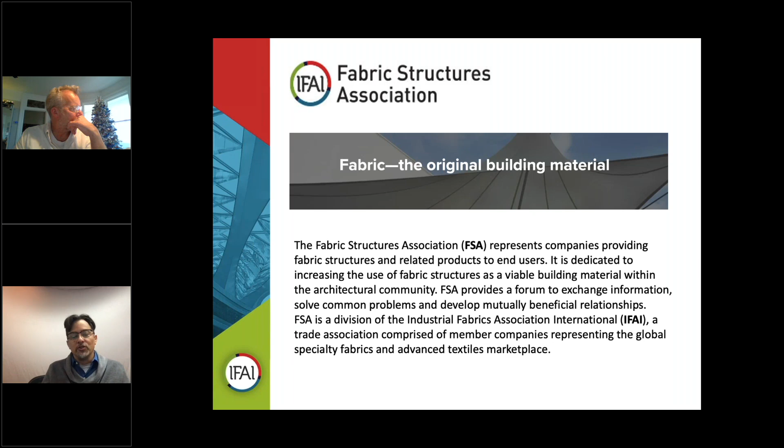How we're going to do today is we're not going to actually run the course as if we were presenting to an architect. We're going to talk a little bit about that, but we're also going to talk about what it is to be a member of the Fabric Structures Association, what it is to give this course representing the whole of the Fabric Structures Association, as well as representing your expertise. We want you to remember, if you're giving this presentation to architects, you're the expert in the room. Don't count exclusively on the material here. Show your expertise, but also cover the broad range of material shown in this slide, because we really want to give an overview of what's possible out there. Know that if it's not what you do, there's someone else in your industry, in your association, who does this, and you can still be the expert passing off a job and securing another job for your company.

So the goal of this course is to give an overview. It's really pretty basic, and I think the idea is to give material that none of you feel concerned about giving. It has a lot of imagery in this course.

So what are fabric structures? What are the building materials? What are the types? How can we classify them, and know a little bit structurally about them? What are the advantages of material choices? What are the options, and where will we find these things? You'll see us go through this in a variety of ways here, and again, we're trying to set this up for you to be successful in giving this course.

I also want to mention I'll be doing a lot of the presentation today, and Dave is going to be looking to your questions, adding more details on each slide. So I'll kick off most of the slides, and Dave's going to follow up and look for your questions. Feel free, especially if it's in relation to a particular slide, to put the question right up there, and maybe we can handle it right then instead of going back — it'll be good to talk about in that course. I'm the official peanut gallery, right, Mar? That's right, your official peanut gallery.

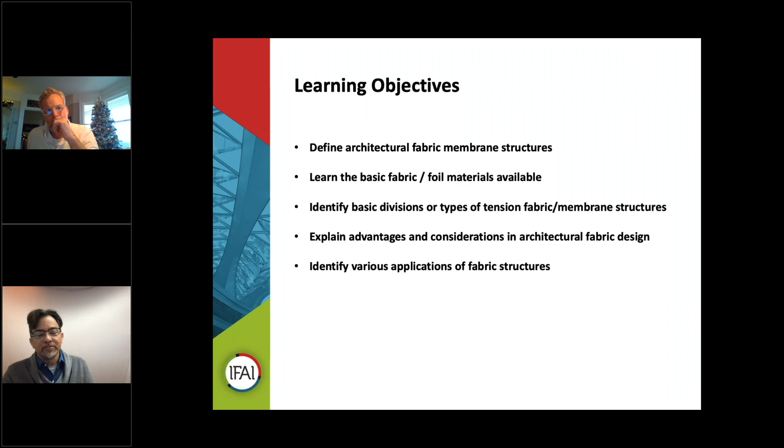So the first one, we're going to talk about what is an architectural fabric membrane structure. This is broad, and I want to start with a broad slide, kind of diverse, and I'm not even showing the full diversity here.

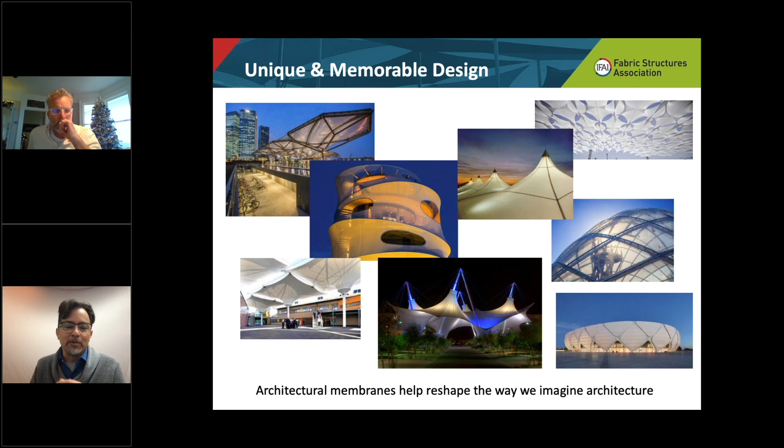Architectural membranes help reshape the way we imagine architecture. That was put in there just like it's an original and unique building material. How can we rethink about everything we do? One of the things we know as the board of the FSA, and has talked about a lot, is how architects tend to think of their standard materials. We have concrete, we have bricks, we have glass. Membrane is an original material, and we want to make sure that's in their mind as a way they can build.

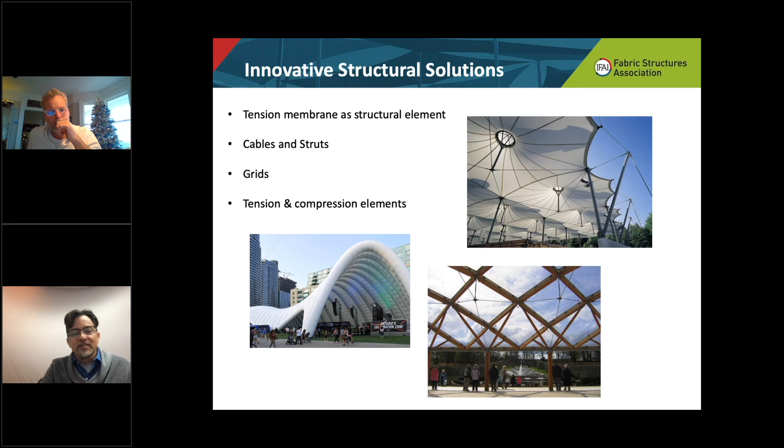What's innovative about using fabric structures? How can a tension element bring innovation that has many benefits? We'll talk about the benefits more. I'm going to go through some of these quickly.

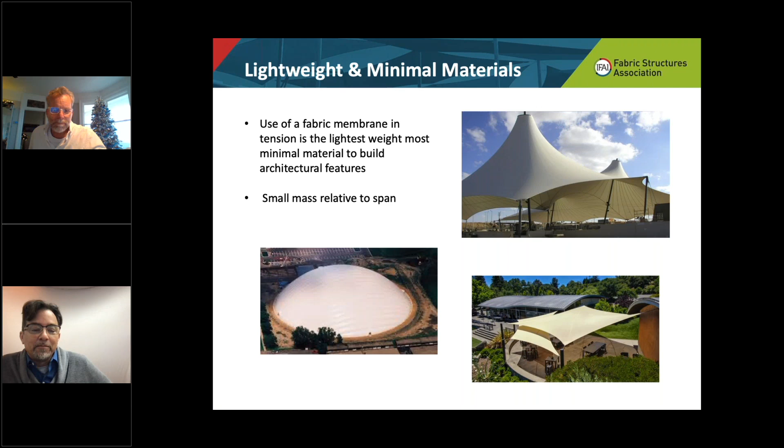Lightweight, minimal material - I think you all know this, but we really want to point it out to the architects - it's the less weight characteristic, less steel, less materials in the project than a comparative other way of building. It's weather protected. This would be physical lightness as well as visual lightness, right Mar? That's right, yeah. Visual lightness makes a lot of the beauty, the visual lightness, the light quality coming through it. All of this, absolutely correct.

Weather protective - what are we trying to do with the fabric and the abilities to handle that, working with it in this kind of lightness way, minimum materials.

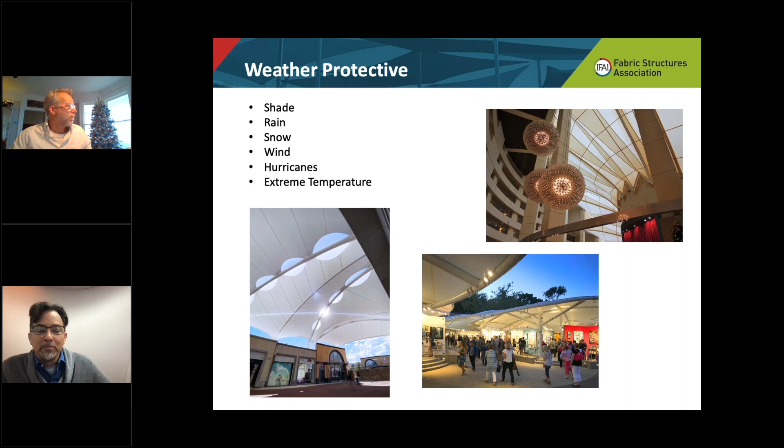And to jump to this one, sustainability by design. Now sustainability is a big buzzword out there, and you have to be - we're working on that a lot as a company - but it takes a lot of groundwork to really say in a classic certified way you're sustainable. But there is something inherent in the design of fabric architecture and the minimal materials that by nature is sustainable. This is what we want to put out there - look at any of these structures, especially where we're under them on the upper right, lower left, there's very little materials compared to the span.

The shade structure is super minimal to put up. Even this large rain canopy on the lower left, look how light all of this support structure is. You're just not going to get this level of material minimalization in any sort of other structure. I think that points to the sustainability, because we're pulling out less of the earth, we're transporting less, our installs are efficient. Again, we're going to touch upon these points all along, but it's something that each of you and all of us as an association can really pitch - that the design, the basis of design, is sustainable.

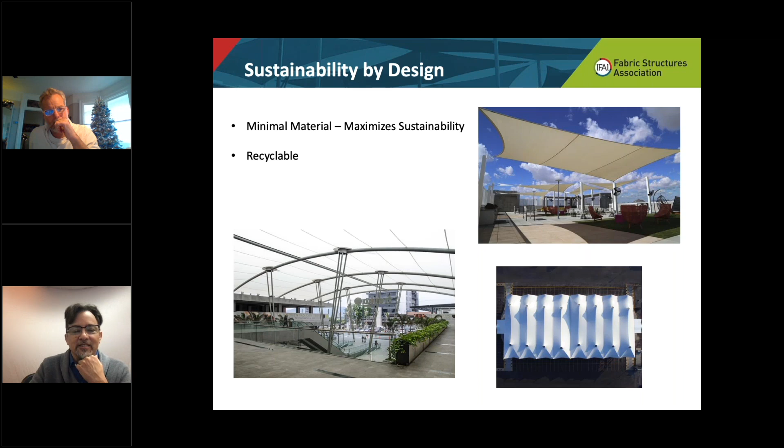And then we get into cost effective. Architecture costs a lot to build, and fabric structures can be expensive too, especially when there's a lot of details, but they can also be pretty much the most affordable way we can build.

This is always a tricky point, and in my experience of giving this presentation it always becomes a question. The architects want to know, well, what does it cost? On the note side, we're giving you a couple of notes about price ranges. Yes, there can be simple air structures that might cost teens, 20s dollars a square foot, but very expensive, very elaborate fabric structures, PTFE with lots of details, could be a couple hundred. It also depends how much square footage.

So it's more about, I think, in talking to the architects, it's really about the items that influence the cost, and reviewing these, talking it through, developing that process. But you've got to give them some background so that they get a sense that they also have to head to experts to figure this out. I don't know what you would say to that, Dave.

I'm curious, you're talking to architects about price point. What would you say? We typically say start with 150 a square foot, but you might be north or south of there, depending on the complexity. And then we also point out that cost is so much a function — we want a rule of thumb that's about surface area and covered area, but in fact cost is much more about the amount of boundary.

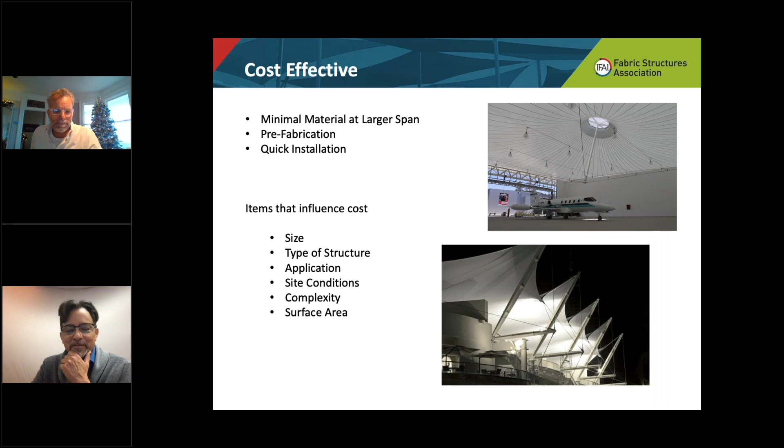So what are some applications of fabric membrane structures? We've inserted these slides of questions, both to stop the visual onslaught of all of the photos and to give a reset into thinking about the applications you want the architects to consider, and the advantages when we get there. So it's kind of giving a breath.

And then we can go on, whereas these other slides, once we're in it, are meant to go fast, unless you really feel there's something here you're an expert in — by all means use that area to expand it a little bit, show your expertise, and show the broad range of solutions available. This presentation by no means covers the broad variety of fabric structures, but there's a lot out there. So roofs, it's a simple way.

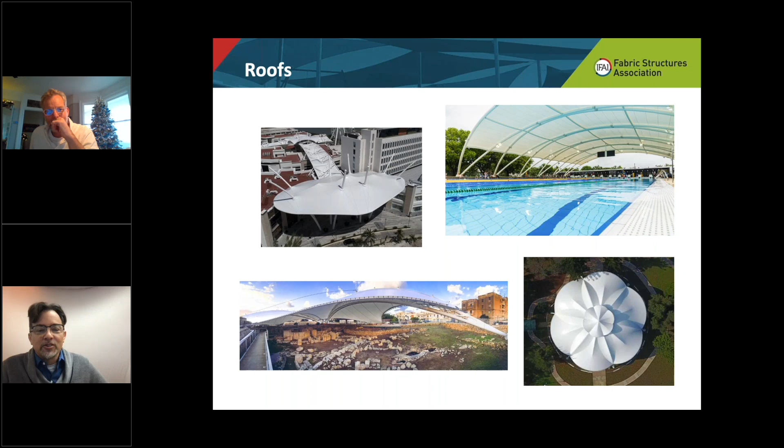I'm pretty large scale here. Roofs are also small scale, and you'll probably see — just to talk about timeline — when we republish this presentation, we'll send you the PDF so you can go out and start to give it, schedule it come the beginning of the year. There'll be some extra inserted slides, more diversity, things like that being worked on by the board now. So roofs are a key way.

Facades, this is an up and coming use that's been around a while, but it's rapidly changing in our marketplace from small scale to large scale. And we can talk about the advantages of facades — going to a membrane facade, being able to print it, or cutting down the cost while having some of the basic support structure be less expensive than they would otherwise detail it.

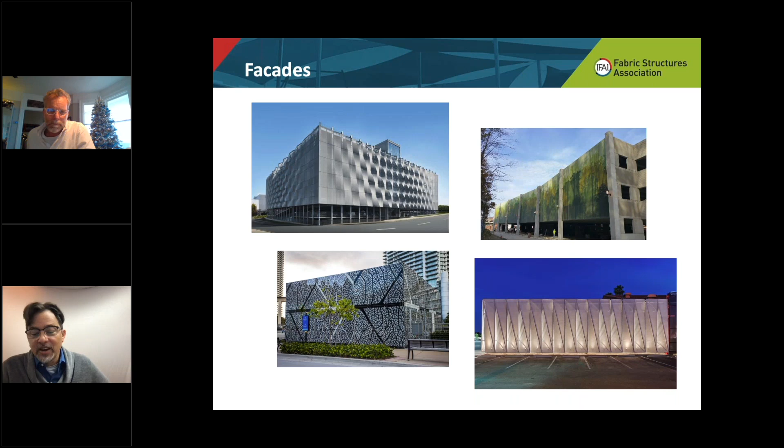The light quality in facades, in all fabric structures, skylights, atrium structures — it's again another application of roof, but a little more specific of an application.

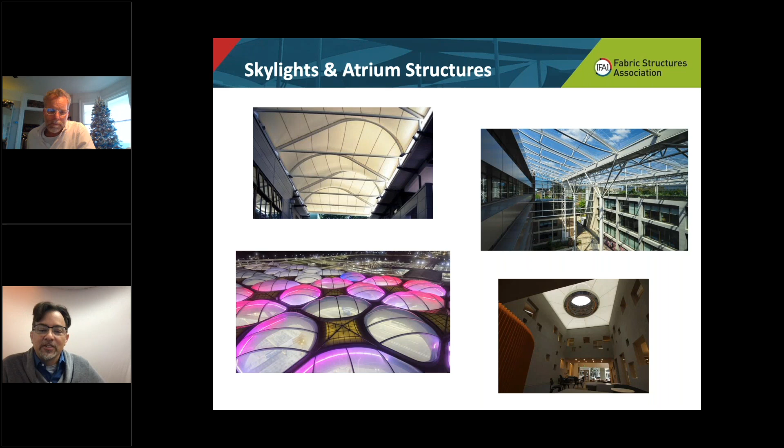Large span — this is one where fabric structures are really the only possibility when we come to really large spans, that otherwise would be too much weight in other materials to do. And so this is why stadiums are so often built with fabric structures.

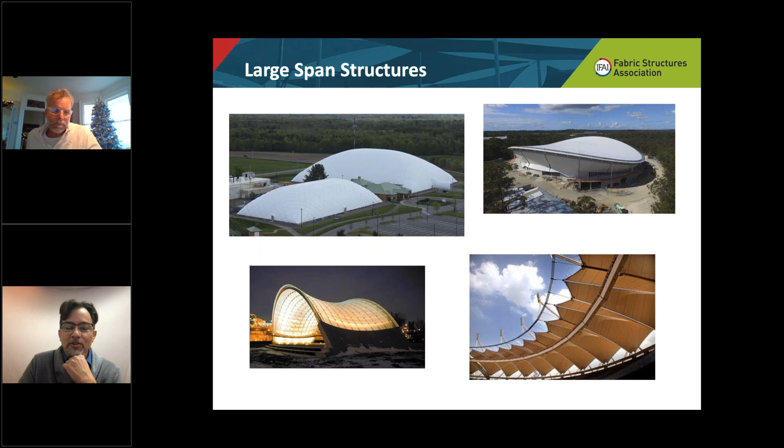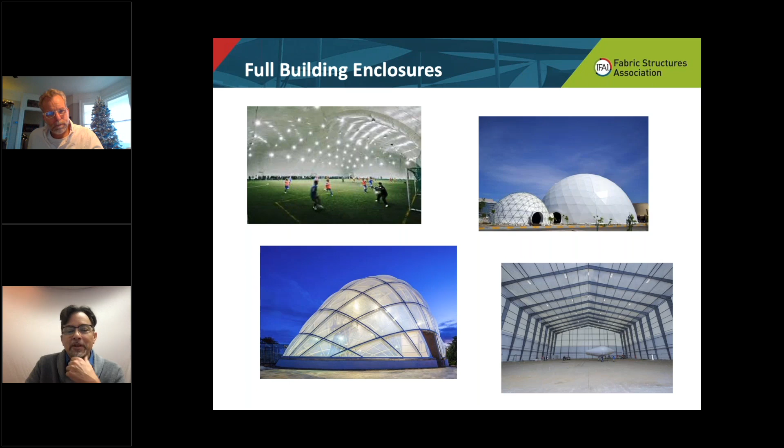Full building enclosures — this is one where, how do architects think about the membrane structure? Often they're putting it in a bubble, like, oh, it might be an awning, it might be a shade structure. Do they think of it more inclusively, like basically this can be almost all of your building? It depends on the application — everything is based on application, of course.

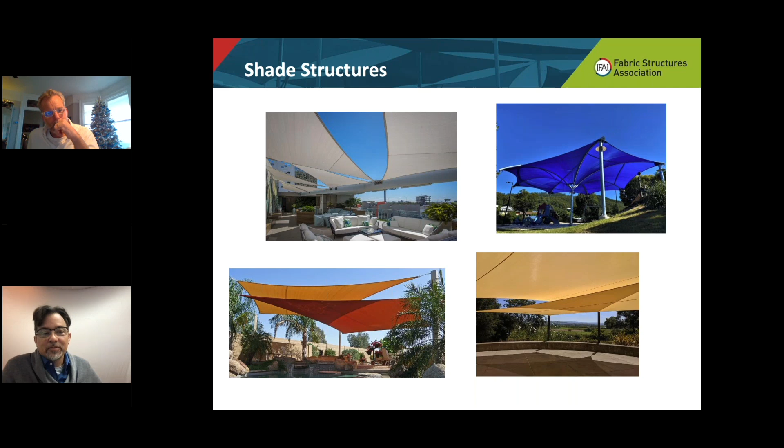Shade structures — I hope a variety of you are in the shade structure growing industry. They can be very heavyweight or very lightweight, but the great thing about shade structures is they can be so lightweight, so minimal, yet provide so much protection that's needed in this time, especially that the world is in. So we want to really focus there as well.

And I don't want to forget all the interior work, the art, the environment — the things you wouldn't typically classify as, oh, a roof or an atrium or these big architectural features, but they're very important to some of your business models, and also to how a place feels and how it comes alive.

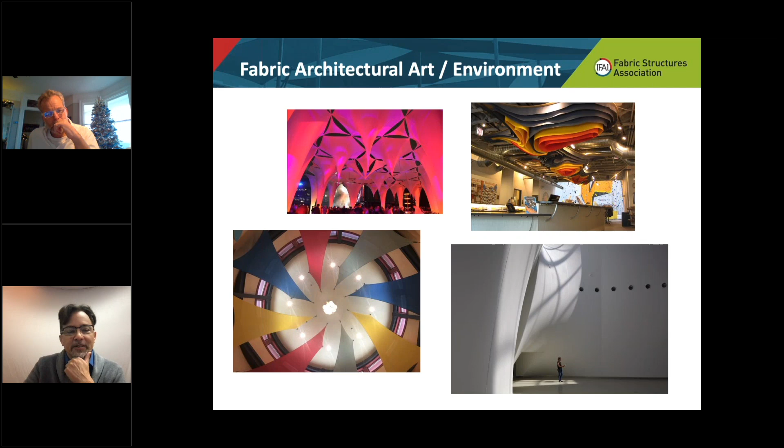Okay, so materials, architects always want to know about materials. One thing I've said, if you're doing this course in person, it's great to take along samples of materials. You might not have everything, but you can call the manufacturers and get samples. They'll happily send them to you, even if they're not ones you typically work with.

And then you show differences, because we're trying to get this broad sense of what's out there. We want to expand on fabrics and foils. The fabric is woven or knitted, whereas the foil is an extrusion process.

This is one I'm asked a lot: can natural fibers work? I'm sure you've all heard architects or owners wanting natural materials. Well, we're meeting a lot of standards and specifics - fire code, other performance needs - and synthetics are capturing that. There might be some naturals that can meet some of it, but in large part, as we all know from this industry, we're using synthetic fibers that hold up and are better solutions than natural fibers due to their longevity and meeting codes. Everything we're going to present here can meet code requirements, and different code and function requirements are going to require different materials.

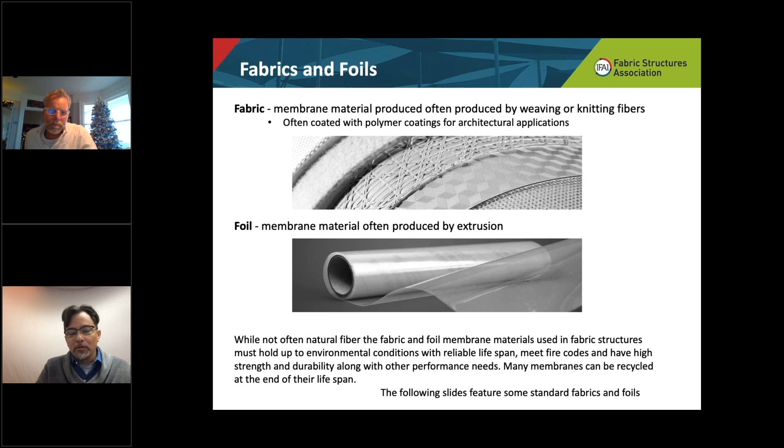So what materials get selected? You have to look at the performance criteria for the project and what's really needed. That's the job of the fabricator, the designer, to work with their client and give them the expertise. This presentation is meant to give a broad sense to the architects and landscape architects, but also to paint that you're the expert in the field, and the members of FSA are experts - no matter what it is, we can find the right expert to help them do their job and figure out which material or structure is really best for their needs.

This list of different fabrics isn't at all complete - it's kind of a quick overview. There's new formulations, new coatings, all of that out there, but we're just going through a little of it. I think a lot of this is what you pick up going to trade shows and staying aware. So unless there are specific questions, this isn't one I'll spend a lot of time on, but we're trying to give the architects a feeling of it.

In an architectural presentation, you might spend longer here or on some of these topics because of the architect's particular interest - something that links to their project. Hopefully you keep project-specific questions towards the end. If they say, oh, I have this project, say that's great, can we stay after the presentation and dive into your project a little bit, because you want to make it through the whole presentation. We're going really fast here because I'm guessing a lot of you know the basics, and if you don't, we'll send it to you so you can review it and ask questions before going to present it.

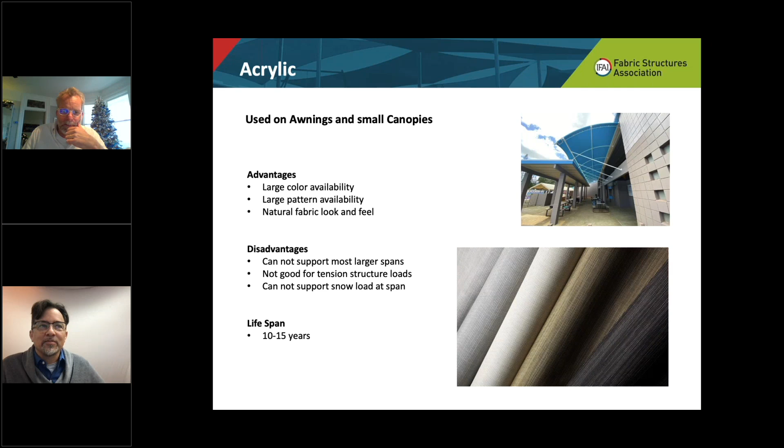One thing I try to do is, when I'm talking about a material, try to make a reference to a material the architect would have had experience with - a tactile experience. So with acrylic, for example, that's like boat cloth material - everybody's been on a boat - or awning material that you would have experienced. It's not tensile structure material, but now they kind of know how it feels and know what we're talking about. It's no longer just a word, it's actually a physical substance.

I think that's very important - just like with shade cloth, a lot of them have seen shade structures, maybe only at less expensive playgrounds with minimal uses, and you're projecting something much more elaborate like in the picture. But it can still use the same material for affordability, because this is an advantage of this material while having great UV protection, great solar protection, etc.

I know we're not giving the actual presentation now - this is how to give the presentation, not the presentation itself. But I want to ask you this: on the shade cloth, because it's knit, it's actually quite a bit more flexible than woven fabrics, isn't it? That's right - because it's more flexible, it's easier to pull it taut without wrinkles. It's like if you want your pants to fit without wrinkles, you buy spandex pants - you don't use fire hose canvas pants if you want them wrinkle-free.

That's super true, and it's a cost advantage, not just the cost of the material. If we talk about the affordability of shade cloth, there's a cost ratio factor, and that cost ratio is in the actual material cost, but it's also in the details.

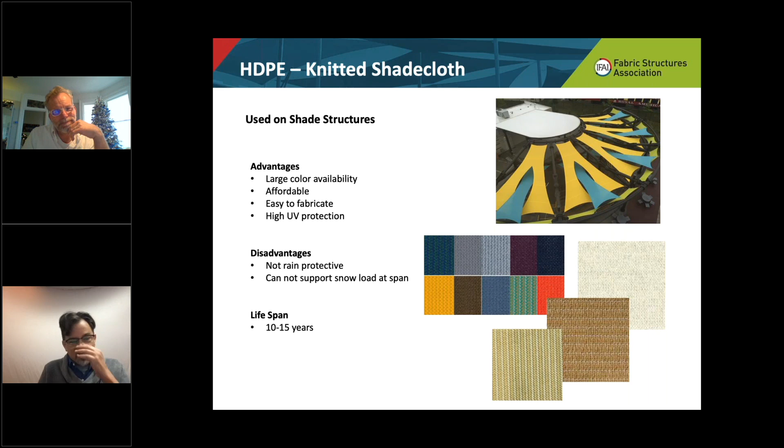And this is an advantage to architects. I think shade structures, all of the fabric structures, all of the FSA, I feel, and the whole board feels, everybody I know in the industry feels there's such a growth potential. It's really needed. If architects understood how to make shade structures look nicer, more integrated with their architecture than just plopped on after the fact, or a playground, not that those aren't great things, but we would see more of them. So there's advantages to point out.

Polyester, there are other fibers used in interior projects too. As I said, this isn't complete, but interiors, what's done for the display space or even divided space. This lower example I really love because it's not even hooked into the architecture, but if you look at its function, these screens are an architectural function. They are dividing space into a larger space, into rooms, into hallways.

This is an important aspect of what can be done with fabric compared to, imagine if they had to build a framed wall to do that. What was their expense, the demolition when they want to change the museum show, etc. Another advantage to the polyester, an open, uncoated weave, is acoustically, if not invisible, it's not highly acoustically reflective. So these can be incorporated into acoustic absorptive panels and things in a really wonderful way.

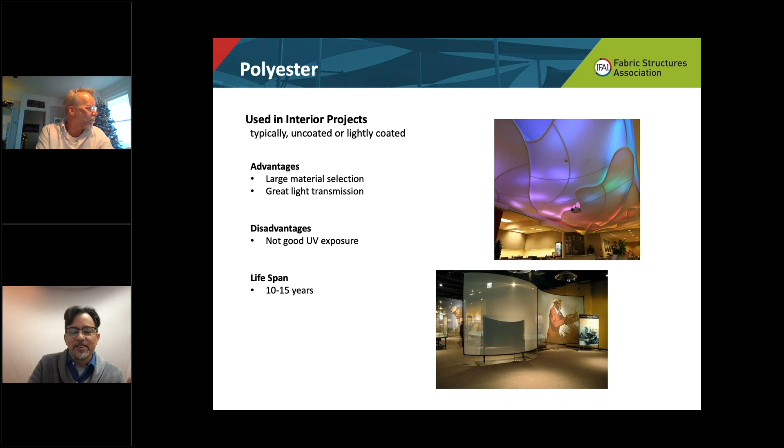That's right, very true, and we could add that to the slide. As you'll see when we republish this, we're going to keep working on it. It's to kind of make it represent everyone's work in the industry.

Coated polyester, this is one of the mainstays of a large part of the Fabric Structures Association, for its rain protection, being able to hold up to all sorts of weather-related loading and extreme factors, while having affordability and flexibility. This is not nearly the affordability of a shade structure using HDPE, but it's not what a PTFE fiberglass structure is.

And there's the coatings, and there's a lot of talk about coatings, and coatings are very detail oriented. We want to talk about them a little bit, especially these top finish coatings. But don't expect, unless this is your area of expertise, to be the expert. We're trying to give a broad sense of the presentation.

The other thing I find is that PVC always, and I think a number of you find this, Dave, feel free to comment more on this, it gets a kind of pullback from almost everybody. But with the top finishes, those are protecting the PVC from full off-gassing. They're protecting it from breakdown. There is more recycling coming up online. It's not here yet, but it's coming.

If we compare it back to, remember, we're talking about design principle, the minimal material, that's the sustainability factor. So using the little bit of PVC we're using in our top finishes might have no sustainability impact, really, it's almost invisible compared to some standard building materials that people might not think of. It's just because we label that PVC up front. So we're using some of these advantages, both in the design sense and in this material sense, to give substance to why you might use it.

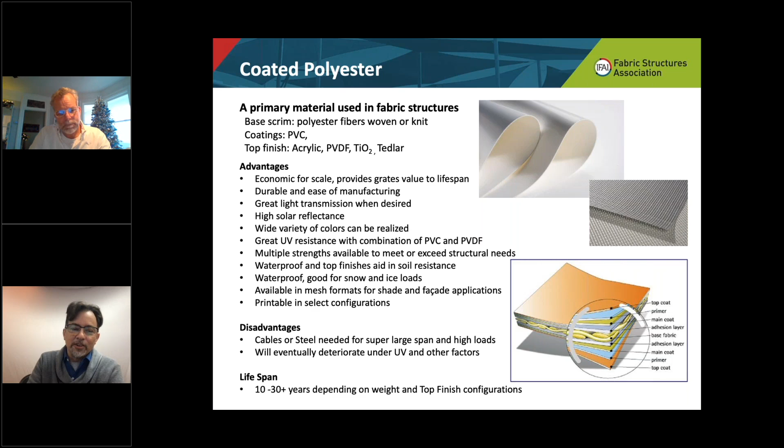So this is to bring into the architects - there's PVC, the color advantages, there's all sorts of flexibility, the ease of fabrication. So all of those make an economic advantage. Now PVCs, even though they can control flame spread, are combustible, so that is a disadvantage of PVC.

And it is acoustically reflective. Fabrics have a benefit of a psychoacoustic perception - because they're soft, people assume that you're in an acoustically absorptive environment, but actually tension structures are highly reflective and acoustics have to be mitigated. That's right. Yeah, they have to be really looked at, especially where it matters.

And fiberglass - now here's a case where the base material, the fiberglass, of course is non-combustible, but the coatings don't necessarily meet that. So we're always in a little bit of strange zones, and fire codes are something that have to be looked at carefully when building fabric structures. This is why FSA pays a code consultant to always be kind of helping us stay in tune with the codes. So a lot of large scale fabric structures use PTFE coated fiberglass.

The strength, the durability, and the lasting capability of PTFE - it's said 30 years plus. We really don't know. The earliest PTFEs are now over this lifespan, and some of them are starting to be replaced, but not all of them. So it's really a long lifespan with PTFE.

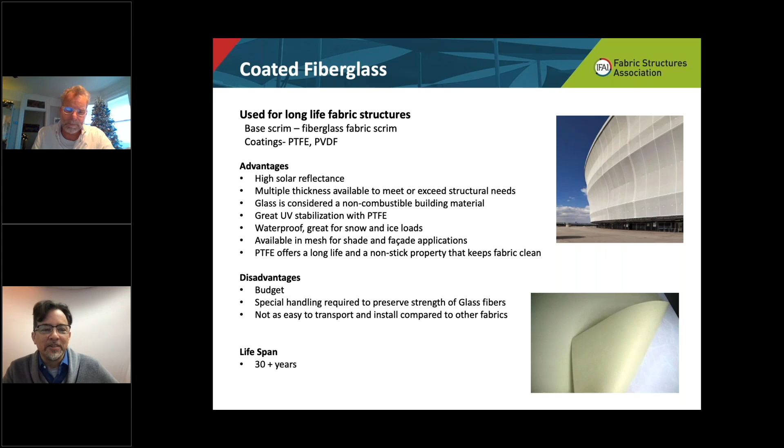I want to say with PTFE - I think it's the only fabric that is non-combustible, which tremendously expands the range of possible uses in buildings. That's why you see it over, if you've got a shopping mall or an airport or major public buildings that are required to be non-combustible, you can use PTFE. That's right. Yeah, if it's pure PTFE fiberglass, you've got it handled then.

The flexibility when you get rid of the fiberglass and just work with pure expanded PTFE, as you know, in a lot of these kinetic structures - of course you can do kinetic structures out of acrylics if they're simple Roman shades, and those are beautiful and functional too at a small scale. But for a large scale collapsing structure, this is really the material of choice.

It's not really a disadvantage, but I put budget down because it applies to both fiberglass PTFE and pure PTFE. The fabrication is really tricky. Even the site welding is tricky and time consuming. There aren't that many fabricators with the material.

So all of that falls in the disadvantage range for getting it out there more at the current moment. This will all expand in time, but it's about understanding those limitations that might have an architect or landscape architect look more at a PVC or simple shade structure rather than saying it's got to be PTFE because we want that huge long life. Is it worth it to pay for the long life, or is it maybe easier to plan on replacing the fabric? So it's probably more about that consideration.

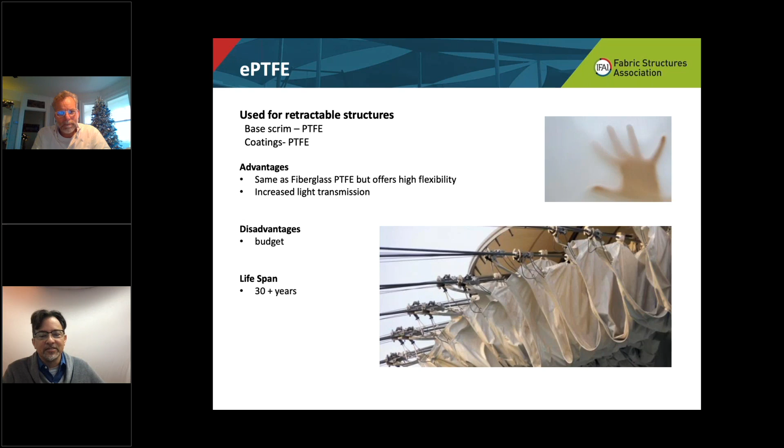Another advantage to ePTFE, because it's all one material, is that it makes it much more recyclable. Is that not the case? It is definitely the case. It's so much easier to recycle this product - PTFE and ETFE, which we'll get to, along with HDPE. These pure products are really where our recycling advantage is.

HDPE, LDPE, polyethylene in both high density and low density - it's seen more in industrial applications as we've focused here, because the actual close-in feel and look, some other features about it, maybe isn't what is wanted for architectural use. But on an industrial level, it is an amazing solution that is really cost effective and also very recyclable.

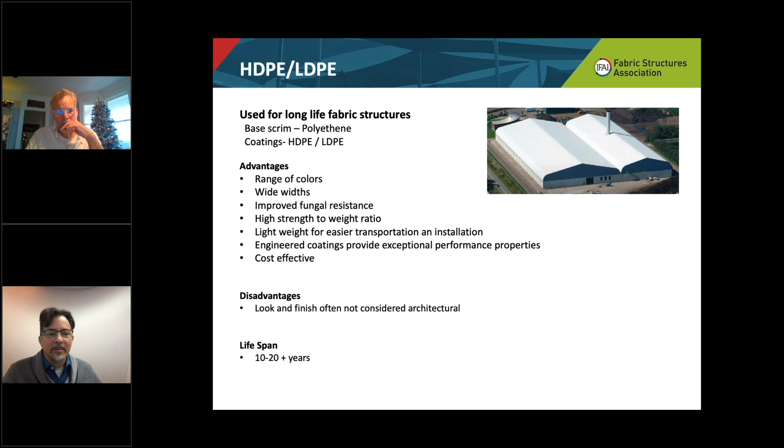ETFE and PTFE are in the same chain of hydrocarbons, just with some differences. So we're getting a lot of the same UV stabilization and long life. ETFE as a foil has this ability to stretch a lot, so the characteristic use has to be designed into the fabric really carefully. How do you deal with that stretch? How do you put that pre-stretch into place?

In the pillow situation, it's often the pillows that are designed to keep it tight over time. There's single layer and there's pillows - both are used, but stretch is a factor in the design, requiring short spans and large curvature, or a combination of both have to be used with this material. So really a lot of design and fabrication sense, but I think this is one area we're going to keep seeing expanding.

And I'm imagining it's not just the specialty large manufacturers that deal with large scale architectural items - that's who's currently doing the ETFE - but I really think, and the slide in the upper right is larger scale, imagine that shrunk down. Small ETFE canopies for being under is a totally feasible thing as a lot more fabricators get into what it means to build with ETFE, and let it percolate through the architectural world more.

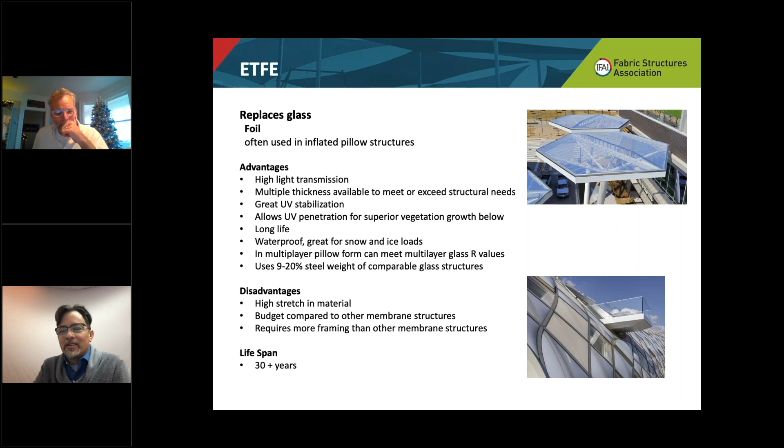Okay, so we want to classify divisions of fabric structures, giving the architect some framework to say: what is the structure design like? What is the framework? What is the system used here?

But tension fabric structure is, in most cases, shade structures that are just pulled. So it's using the efficiency of the tension material. Essentially you don't see much in the way of horizontal compression members or horizontal steel members. The tension structure is lighter overhead, often uses cable technology tied to it, but doesn't have to, because it's the fabric in tension through a large span.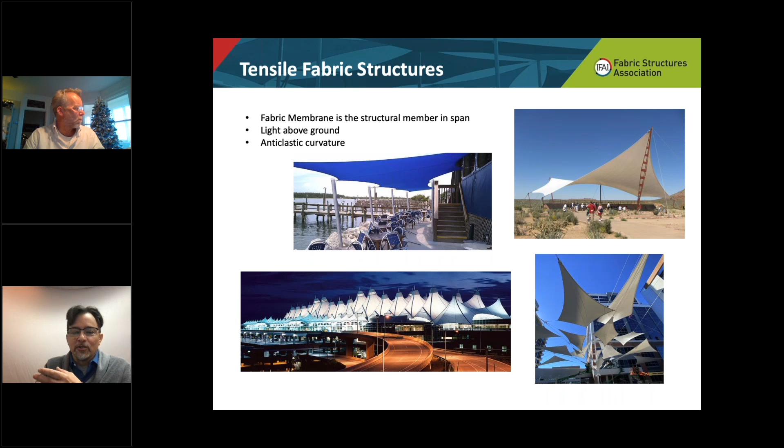And here, curvature in the design is a really important stabilizing feature. You notice it in Denver Airport, where we have a high snow load, a high degree of curvature in the design of this structure.

Frame supported. Again, they could be very simple frames. There's a lot of work done with simple frames. These are some rather ornate frames showing diversity of frames, but the frame system is very easy. Then using the fabric as a membrane over that, it's still a lighter cladding. Even though we might say this has a lot more framing than a tension structure, this is still a lightweight structure.

And we want to really bring notice to that. Any other cladding, especially a rain protective or shade protective material, is going to add a lot more weight to the structuring, even though you might use the same structure system for a different material.

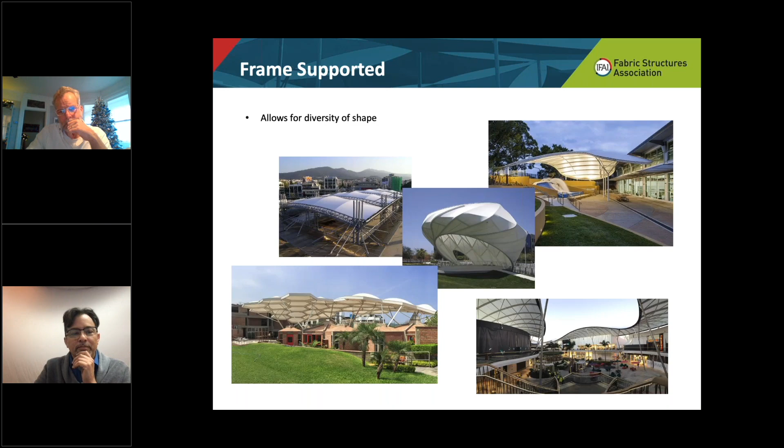Grid shells are another lightweight technology where, instead of large members, we've evenly distributed smaller members to hold big shapes and forms, with a lot of double curvature in most grid shells. It's really kind of artistic, but it is its own standalone type of structure. So we want to note that frame supported.

It really integrates well with fabric, right? Because the grid shell is a form-active structure that depends on that double curvature for its structural integrity. And the fabrics are membranes that can accommodate the double curvature and complex geometries really, really well.

So we're seeing that wood grid shell you showed, I'm pretty sure it's a single layer ETFE roof on that one. That's right, that's right.

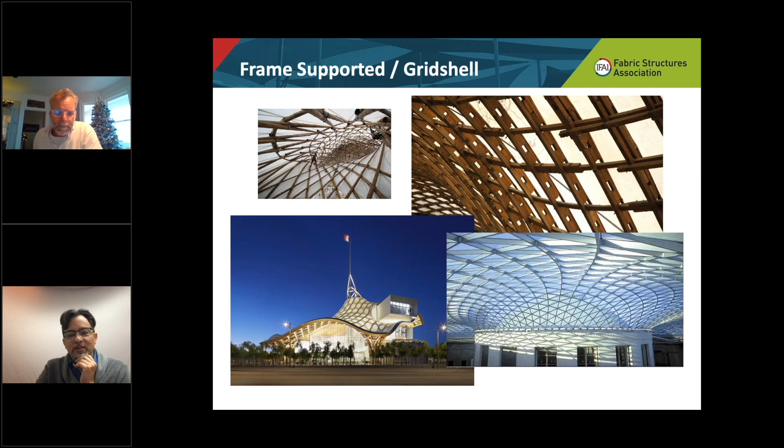Geodesic dome, again, it's a great material, and there's a lot of relation between grid shell and dome. A dome just has that simpler shape going on here. But again, combined with a fabric material, it's really a perfect example. We have examples of multiple different thicknesses of fabric here, and also ETFE cushions being used on dome structures.

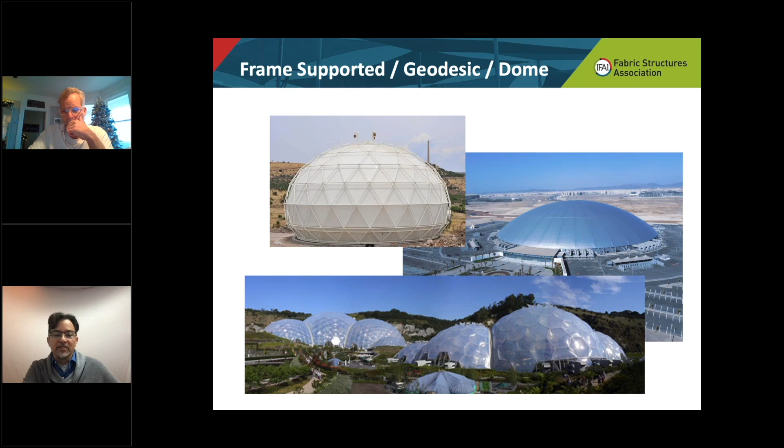The other thing is that the fabric, both in a grid shell and in a dome, depending on how it's attached, can help stabilize the whole structure. It does in the Eden Project and on the lower side of this, and it does essentially for a lot of grid shell structures. So the tension in the fabric can be advantageous to the structural system.

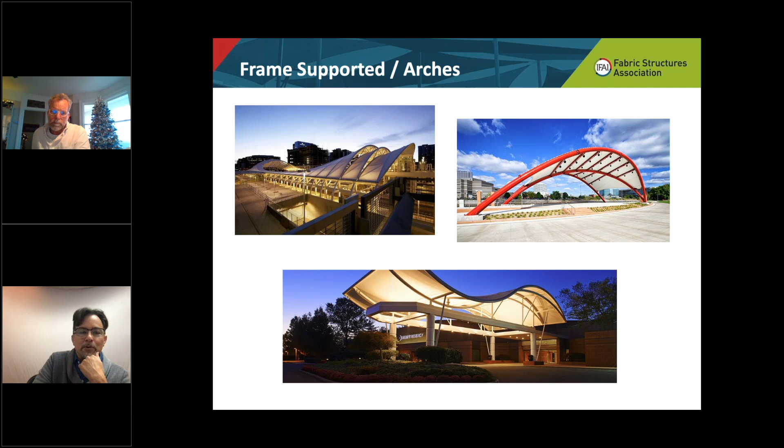We see arches used a lot, so we're separating that in frame supported, because there's a structural efficiency in an arch. Traditional bridges show arches a lot versus straight members—there's just a structural efficiency to the arch. It also creates a feature, so fabric's able to work with that feature to find that feature. There are many sorts of arch structures and many different ways and detail levels to do that, but notice that the arch is an important structural element that separates the type of structure.

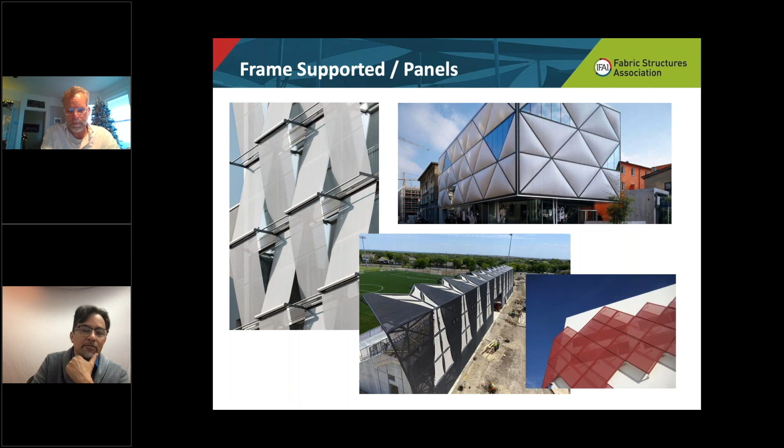Then we get into panels, paneled structures and paneled divisions that make things systematic to build and install. These panels are used a lot in facade projects. We can also think of panels as cells if they become three-dimensional. There's a lot of variety in frame supported structures, and this isn't representing the full variety, but you can see we're showing a lot of options to diversify the architect's view of what's possible. Who knows what they'll grab from here and link into something else, opening up a project that's never existed before.

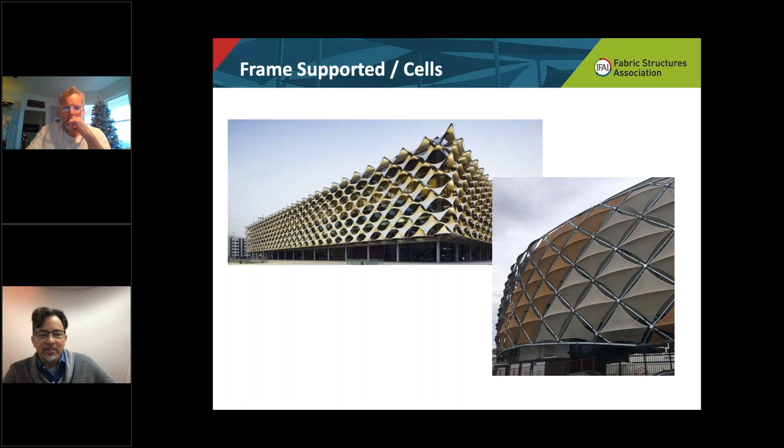But we're also in a really modern industry—don't forget each one of you is in a modern industry that hasn't existed even for 100 years, and we're going up against balloon framing, concrete blocks, and bricks. There's a lot of education that we need to do. We're still in the early days.

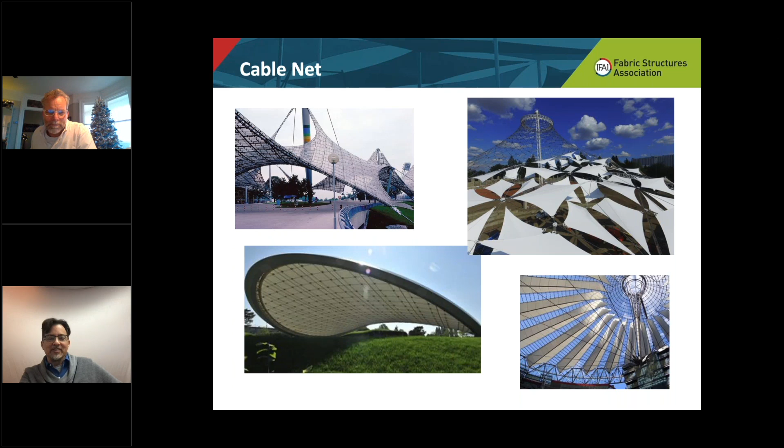I think of this like grid shells that cable nets rely on, that anti-clastic compound curvature for their integrity, which makes them so symbiotic with fabric structures. Yeah, it's basically taking that form and turning it into a line. As we know on the analysis side, this is kind of the early way these structures started to be analyzed, because it was too hard to analyze the whole membrane—so you thought of the membrane as a whole series of light cables. It was one of the early ways it was looked at.

To expand the cable even more, there's the tensegrity feature. What is actual tensegrity? If we look at the true definition, it's these floating struts—but the upper right has these continuous members that aren't part of that design. That might be true technically, but we are using a tensegrity feature in a lot of fabric structures, especially long span, large loading fabric structures, to improve stability, because those vertical members add great stiffness to this otherwise very thin shell.

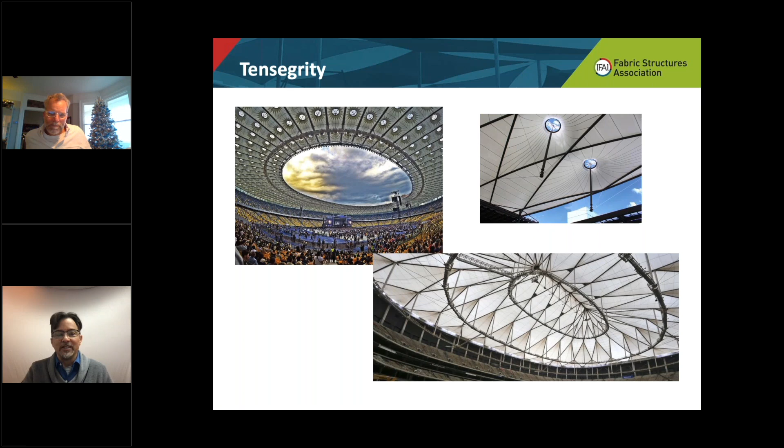As soon as you've got a compression element held in place only by tensile elements, not connected to any other compression element, then you've satisfied the definition of tensegrity, haven't you? Yeah, you've satisfied it for that micro element, but the whole structure might still not be, in a maximum form, a tensegrity structure. But we're using tensegrity principles, and people notice it becomes an architectural feature—a defining feature.

Air supported structures are used a lot in industry because of affordability. These are for a full building enclosure—talk about affordability, this is the cheapest way to go. It's also able to go out to a field, make a building for a period of time, and then take the building away—it's just fabric and the air handling system. There's an incredible advantage as far as materialization, and we don't want to forget that advantage when looking at the design. Again, it's what is the need, what is the actual program for the space?

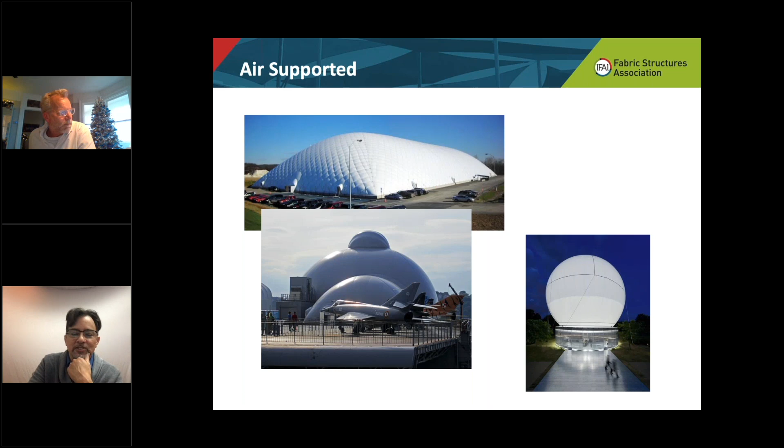Then there's air inflated, which has a very similar ease without much structure, but often has a lot more fabrication time built into the skin of it, holding the shape—but it could be much more architectural, handling some amazing features or amazing functions. On the left we've got features, on the right a little more we have function—so what is that defining factor? There's air supported, there's air inflated, where we're actually making a rigid wall in the air inflated tubes.

As soon as you're pneumatic, everything wants to be a sphere or a cylinder, right? And that limits you in form. But the air inflated elements are just made up out of cylinders, which gives you an awful lot of flexibility.

That's right. There's a lot of design in all of these structures and patterning. I'd say a lot of detail work to understand the final form compared to the predicted form, and where the materialization affects it.

So air inflated and air supported are both very specific fields in fabric structures. A major distinction is that in an air supported structure, you are occupying the pressurized environment, so you need to walk through an airlock to enter. Whereas with air inflated, the pressurized environment is within the pillows, so they're a more user-friendly building in that sense, easier to inhabit.

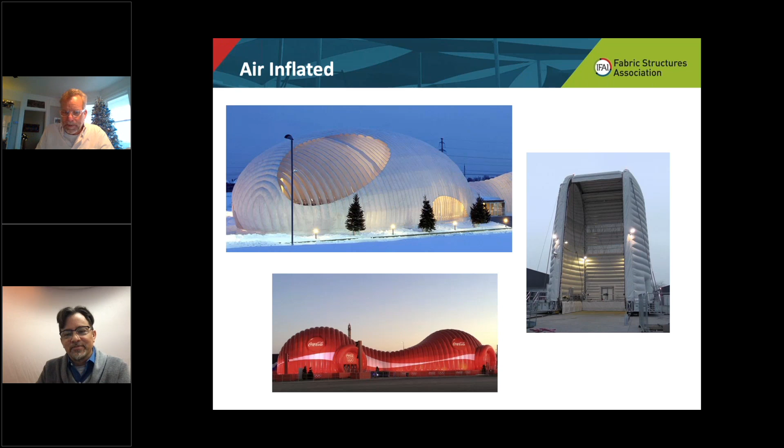There's a reliability issue though, isn't there? A little bit, you know, in both of those there's always a reliability concern, and there needs to be backup air systems. So everything in fabric structures, there's no one correct answer or one way to go. You have to check what you're trying to build, what you're trying to achieve. This is where you're the expert, and you can really tell that story as they're asking about it. And even if you're not the expert, someone in the industry is, and it's a matter of what systems, what are you trying to achieve, and what do you need to put in place. With air structures, you have multiple backups - backup power, backup blowers, etc.

And manual intervention in big snow events, right? Because the inflation pressure can't be as high as the snow load generally, which means interventions are potentially required. So that's just a thing you manage - you have to plan for it and allow for that.

And the same holds true here in retractables. Retractables are one of the new things really more and more online, but there are traditional retractables, Roman shades and such, that have been around. Retractables need that backup power - they need to know if they can't handle the full loading, how do you make sure that they're ready to fold up? This is part of that detail, code compliance, another step of it.

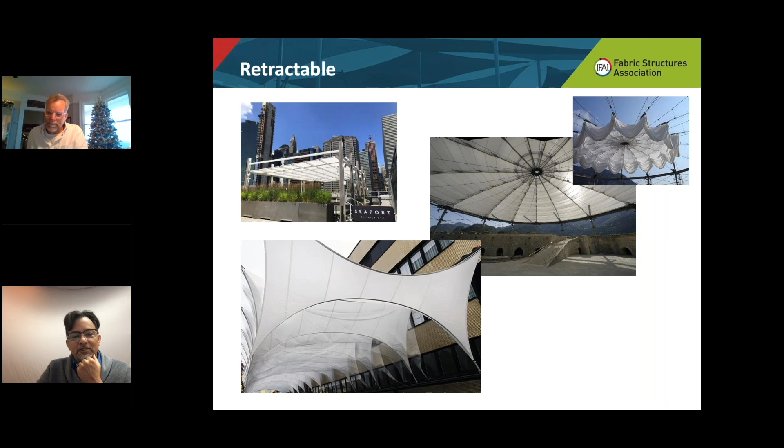But really a lot of diversity, and a lot of people really want this, developers. And hybrids - we won't talk long, but there's mixing technologies. I think there's always new fields created from taking something from one, combining it with something from another. Sometimes by introducing this material to architects, even though they might not traditionally do this type, they see a road to combine what they traditionally do with something here, and it might open up some sort of design ability to do an architectural feature they've never thought of. That outside eye can sometimes be a changing point.

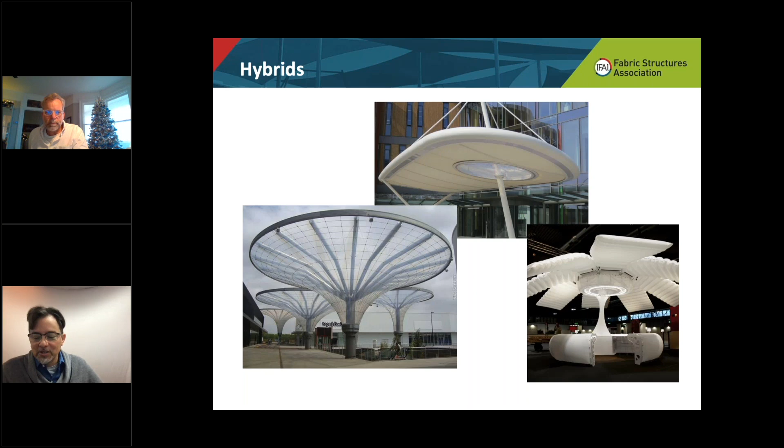So what are the advantages? I think we realize we've been talking about advantages all this time. A lot of these things you see are kind of cyclical inside this presentation. But one of them - we've talked about the lightweight, the minimal use of materials - but the prefabrication, the fact that most of this work happens in the shops of the fabricators, in your shops, etc.

This is an advantage compared to traditional building arts that send someone to the field who's really the craftsman. Of course, we have craftspeople and tradespeople on the field to actually install these, but the installations are very short time, and a lot of the really detailed work gets constructed off-site. So that's an advantage for sure, less installation time.

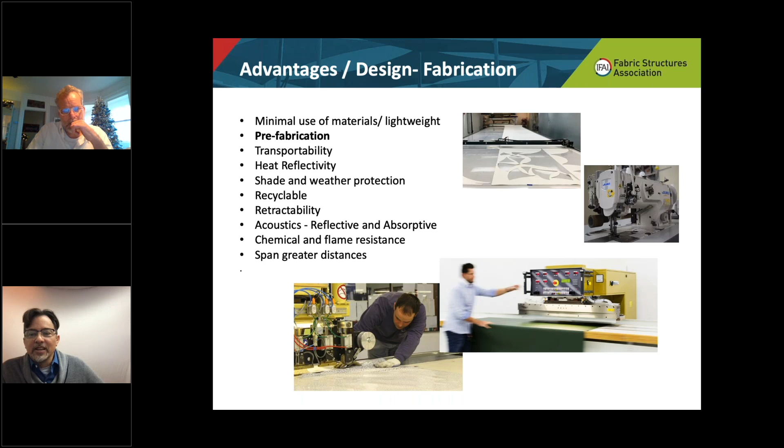There's a lot of other advantages here we can speak to. We get into the durability, the loads, knowing that the right fabric structure can hold up to whatever weather conditions, or the tensile structure will hold up to the weather conditions that it needs to. It's just about designing to those conditions.

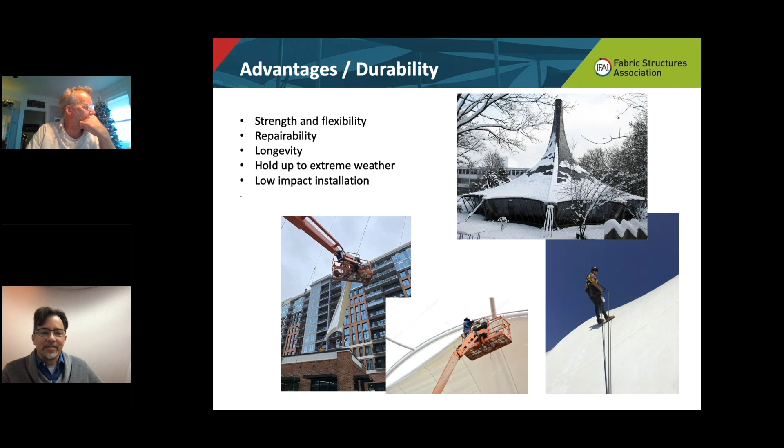And then there's just the visual aspects of what's going on and how this might accent the whole architectural place. Fabric lights beautifully, and I don't care what it is, but it lights beautifully. I've seen beautifully illuminated building awnings on structures that are more part of PAMAs than our work, but just the right lighting on that fabric really makes it come to life and changes the whole architecture being present.

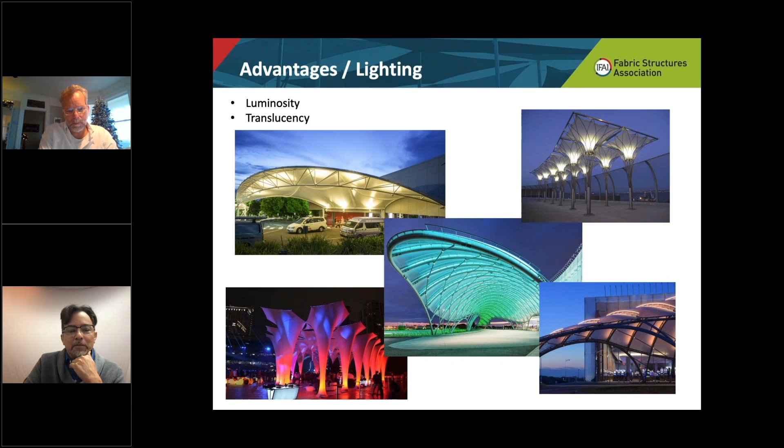Considerations in design, speaking to our second course - this is the first course, and our second course is really going to take what here is essentially a couple slides and expand that into a full course. That course will be presented to you in this format in the early part of next year, and we're aiming for a March release so you can start to give the course.

As we've talked about, not all fabrics are the same. They don't have the same needs. It's about what you're using them for - symmetry, the economics of it, whether you're building a frame - and this is where you might have expertise. You might even have an example of something you can speak to. Again, there's a lot of material here, so we don't want to go off course too much, but paint yourself as the expert, because you have experience that can add into this so it doesn't feel like a canned presentation.

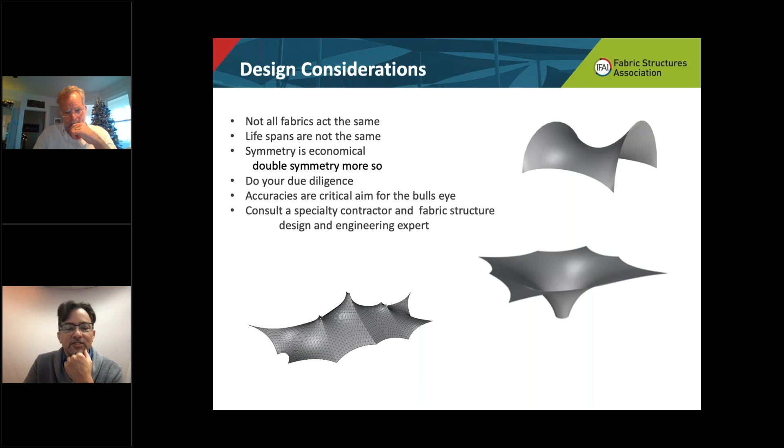And then we can talk about timeframes a little bit. You can talk about timeframes in your shop. Now, we all know how COVID has disrupted timeframes for getting materials or building, things like that. But there are some typical ones. Even on larger structures, it says 2+ years, and I know very few larger structures that manage to get done in that timeframe. That's still a pretty minimal timeframe.

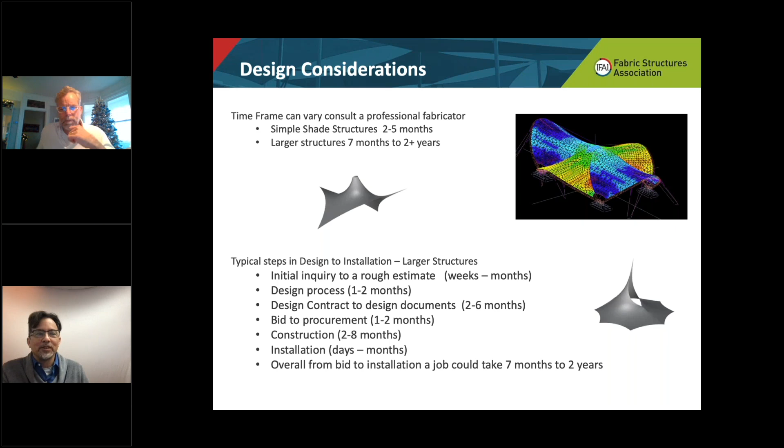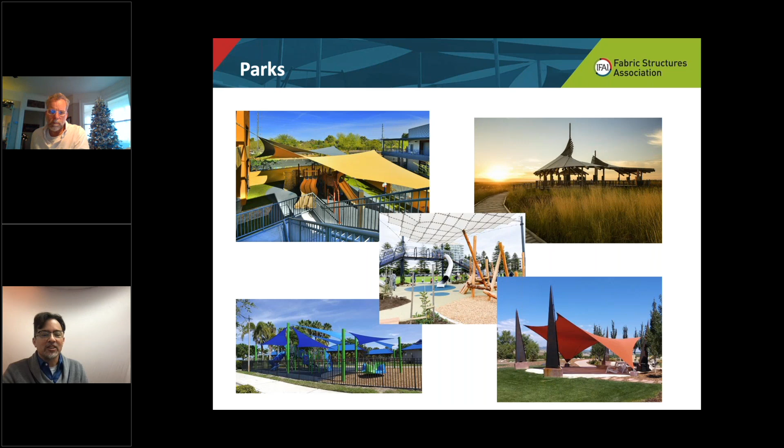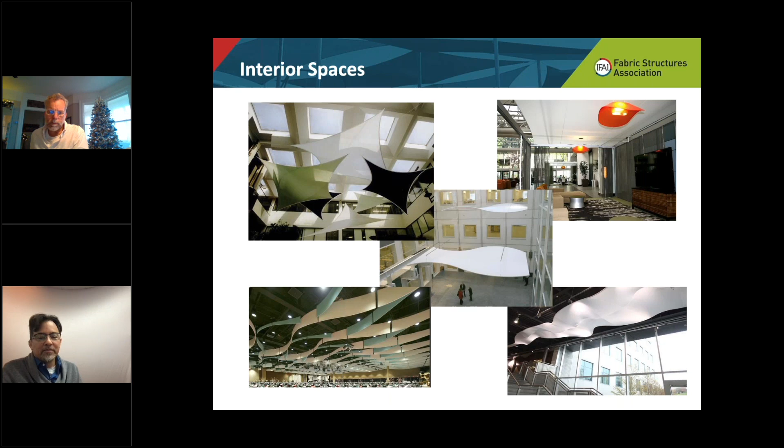This is the last part of the course here, and I know we're running tight on time, so we'll try to hurry through this. We're kind of circling back - we started with applications, so now we might say, well, where do we find those things applied? Instead of shade structures, we're thinking about parks, and residential applications, and interior spaces. You see a lot of different frameworks here - some are framed, some are free tension structures, so we're seeing different applications fall into different usages.

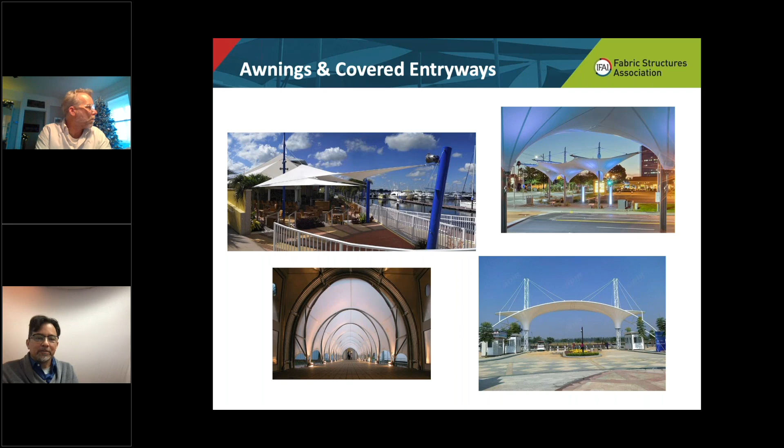Awnings, covered entries - we're trying to give them imagination, because this is leading into where they might have a project that could use a fabric structure, a fabric membrane structure. Hospitality industry is a big one - covered tables, outdoor dining. I think the increase in covered outdoor dining since the pandemic has driven a lot of business into this industry, and I don't think that's going away. It's going to be an interest. People love being outside, no matter what - it's always a nicer environment, and there's a lot of studies on that.

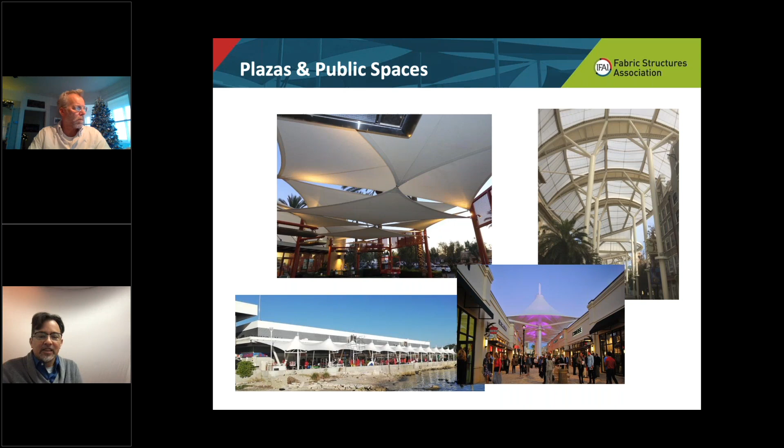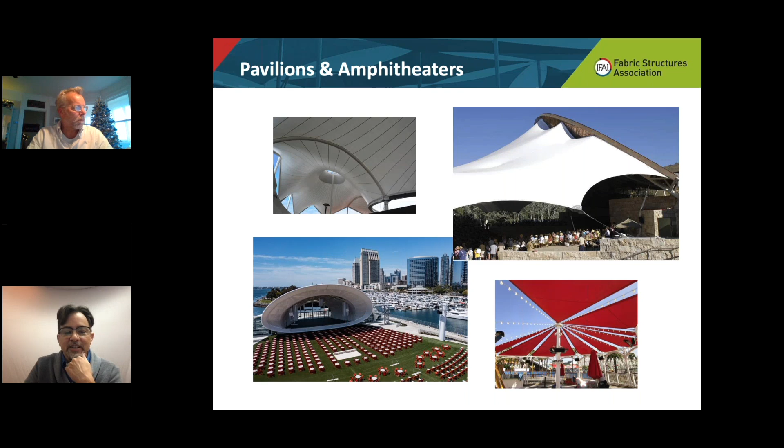Protected public spaces, whether large scale or small scale - it's again giving that weather protection, whether rain or just shade. Pavilions and amphitheaters - now we see some really large projects on a grand civic scale, but it can also be done with a simple shade structure that has some music inside of it or something enjoyable.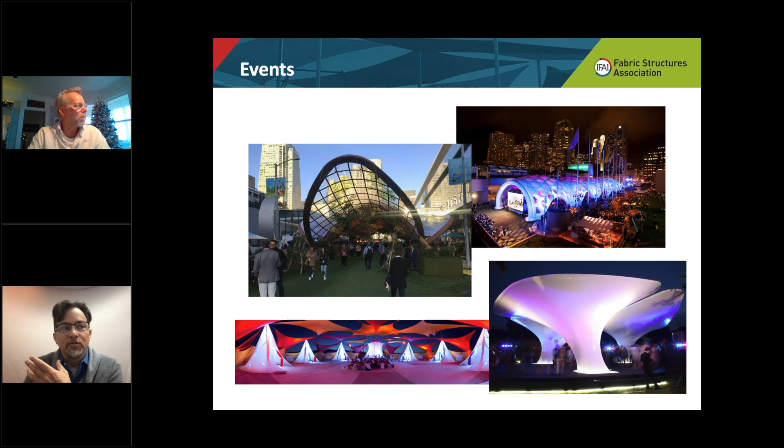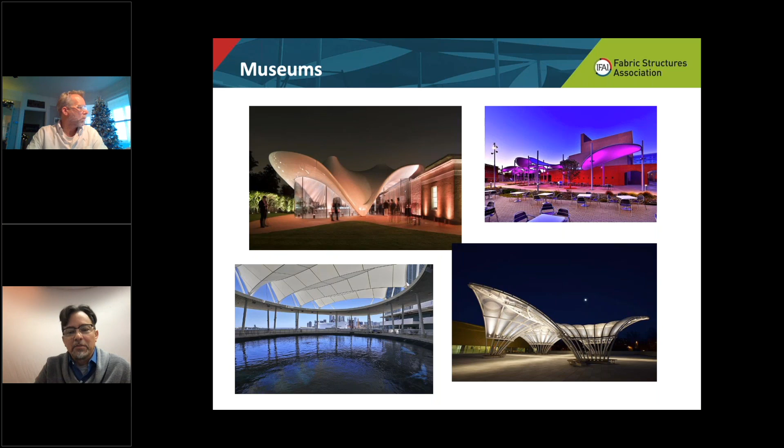Museums - museums want to stand out. They want to be artistic. They want to have design features that are memorable. So as far as that goes, it's a great place to innovate with fabric structures and do really beautiful work.

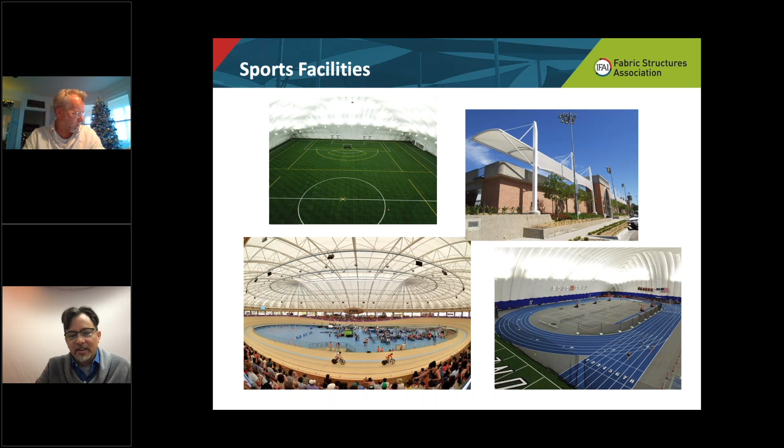And then we go to some opposite sides - sports facilities. Here we need affordability, so we need to be able to do large covered, large enclosed spaces. Again, air-supported structures come in, but not always - sometimes they're frame supported, like in the upper right.

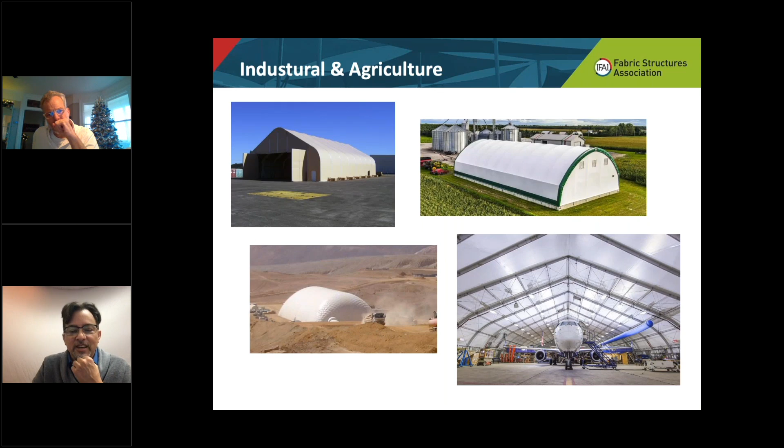Agriculture and industrial, there's a large use of fabric structures. Now, this is not really going to catch the eye of the architect so much, but you never know. There's some beautiful applications at airports where they don't have the ability to do a custom architecture piece everywhere, so they use a little bit of industrial combined with some nicer, more finished architectural approach.

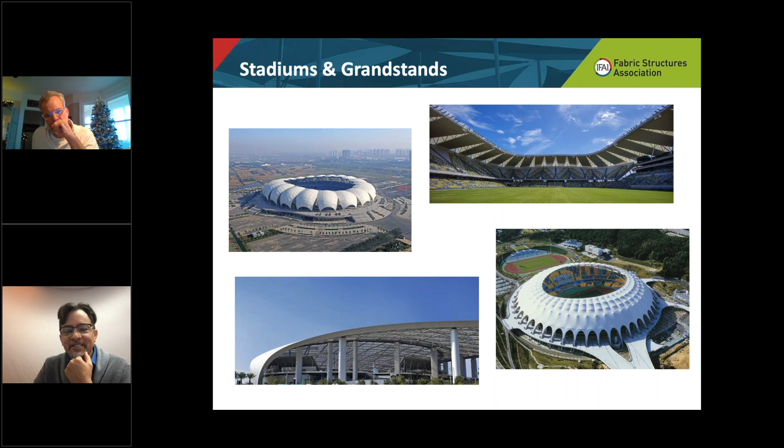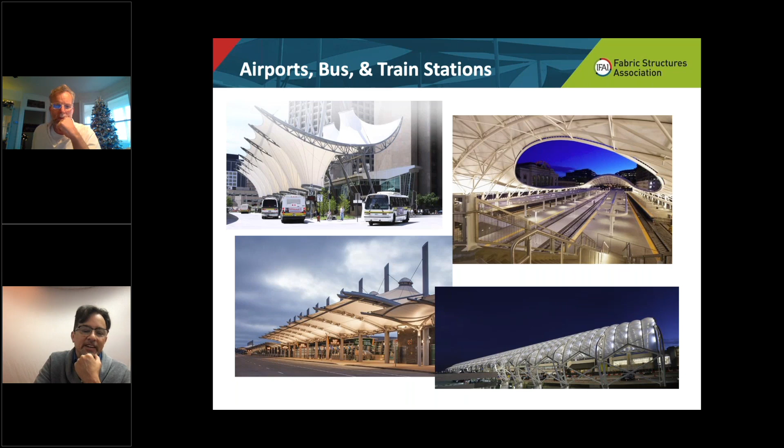Stadiums, grandstands. This is a given that fabric is a choice because of span, cost, ability to build. Airports, bus, train stations - these are all very large scale, but there's a lot of fabric structures on a very small scale that are very effective in a local, small regional setting.

We put this in here because this is where your dialogue gets more question and answer with the architects - it's like, do they have something this might fit into? I find that pretty much every time I give this presentation, there's at least one project where they want to consider it and talk about it afterwards, or want to find the application. Like I've said before, this might not be an application for my company, but probably if it isn't, I know who, or can figure out very easily who in the industry is going to best serve their needs, and still paint myself as the expert that way.

I almost think, Mar, we need to add a category for conservatories, because something like the Eden Project is obviously a very beautiful building, but in fact it was an extraordinarily pragmatic decision to use ETFE from a span and light transmission point of view. That's right, ETFE really gives that advantage - plants love it because it doesn't filter out UV.